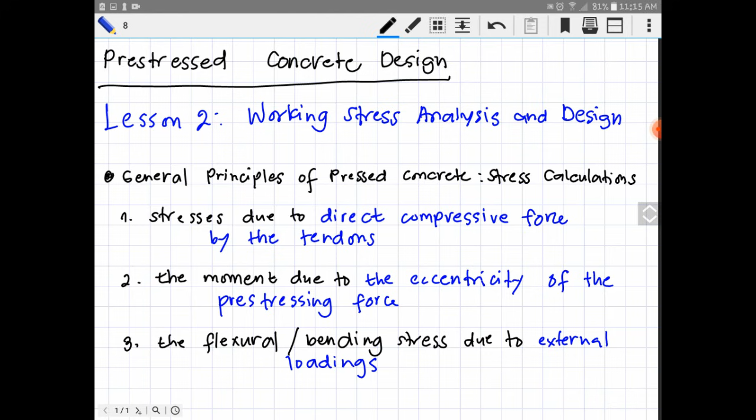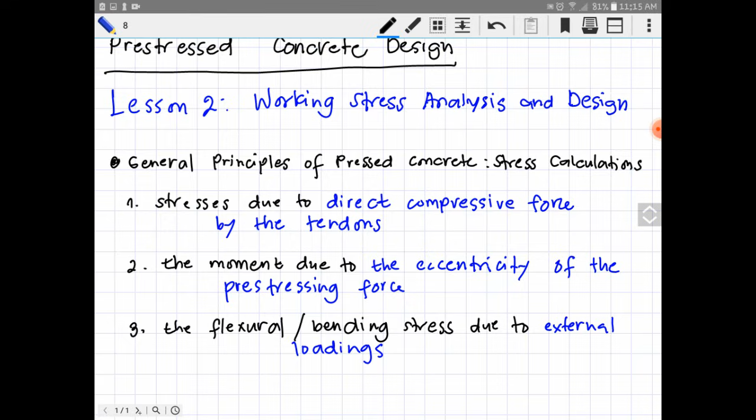We have three general principles of pre-stressed concrete. The stresses to be considered are: number 1, the direct compressive force by the tendons; number 2, the moment due to the eccentricity of the pre-stressing force; and number 3, the flexural or bending stress due to the external loadings.

So what is the principle of pre-stressing? Let's start with the basic concept. This is a simplified approach used to determine the internal stresses in a pre-stressed concrete member by considering the combined effect of the pre-stressing force and the external loading.

Consider a simply supported beam, assuming the tendon is below the neutral axis. So this is our tendon, and of course our beam also has a neutral axis here. Let's label it NA. So as stated, this is below.

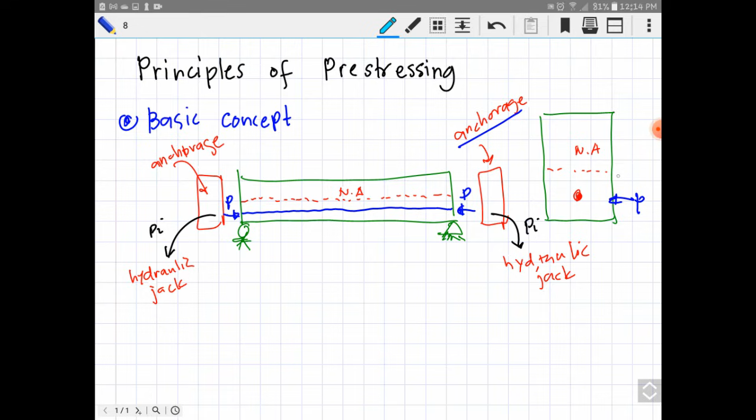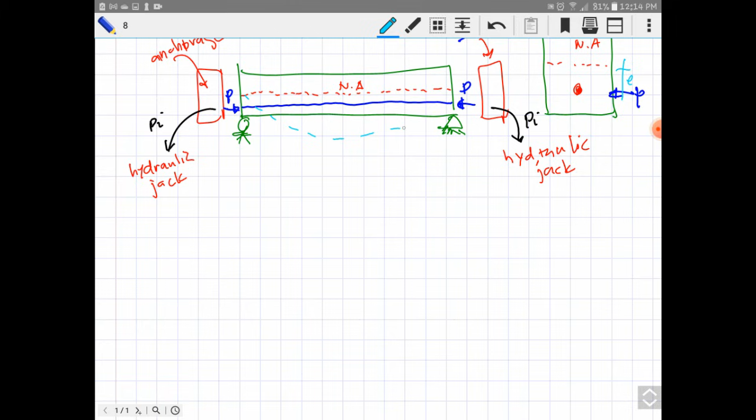Now, when we have stresses or flexural bending due to external loads, the beam may deflect. So let's assume the beam deflects. The neutral axis, of course, remains the same, but on the top fiber it compresses. So we can label this with letter C because it compresses, and our bottom fiber experiences tension.

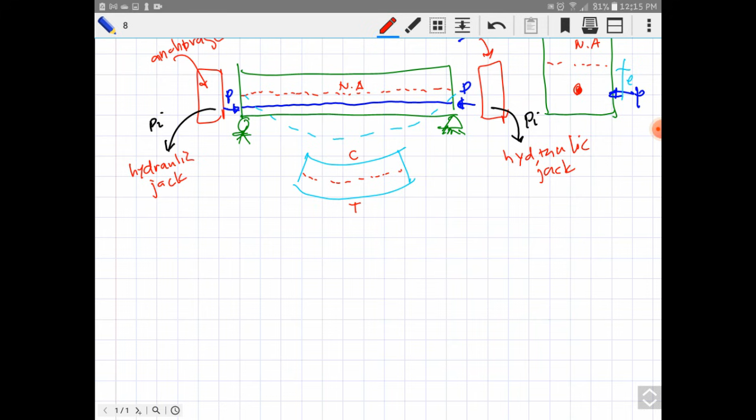Now, as stated in the three general principles of pre-stress, we need to have flexural stress due to the external loadings. So we can place here uniform distributed loads, such as the self-weight of the beam, or our dead loads or live loads. So we can have self-weight plus dead load plus live load.

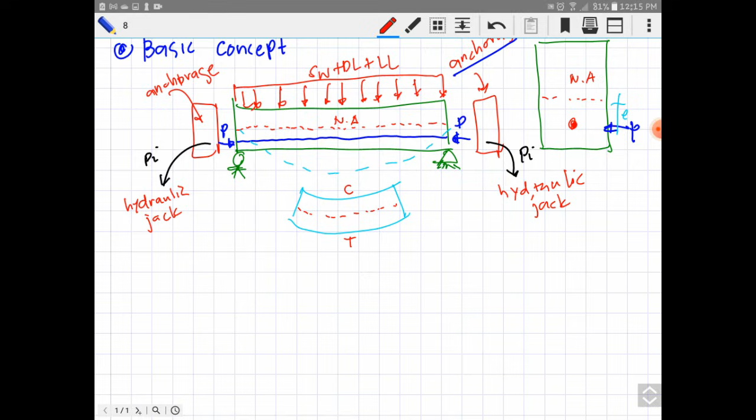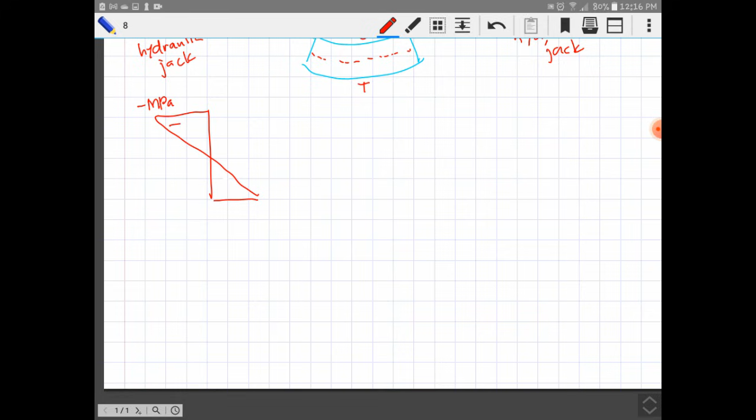So when we take the bending or flexural stress due to the external loadings, we can illustrate it like this: we have a negative MPa at our top fiber, and we have a positive MPa at our bottom fiber.

Now let's add our stresses due to the compressive force by the tendons. Since that is axial, this is negative MPa on the top and negative MPa on the bottom.

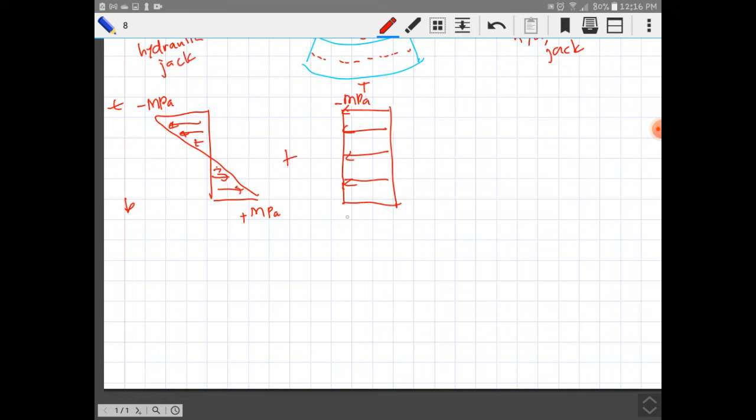Then let's add the moment due to the eccentricity of the prestress. So according to our rules, our flexural stress should always be opposite to our moment due to the eccentricity of the prestress.

So now, our illustration would be that the top fiber will experience a positive megapascal, while the bottom fiber will experience a negative megapascal. Let's get the resultant of that. By the way, this is just an illustration, so this is what we would get there.

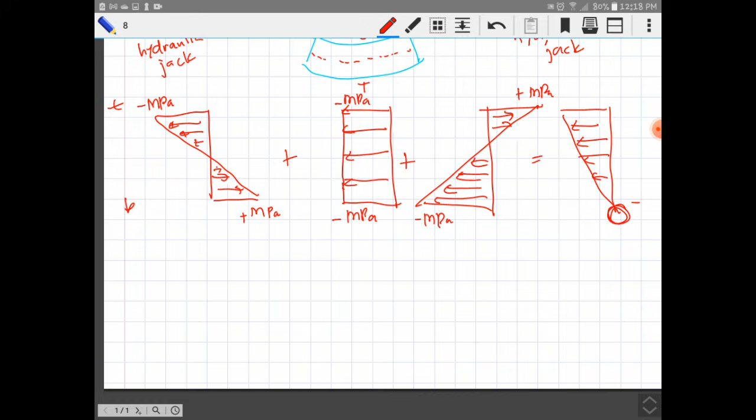So here is our general formula, which we will use in our problems. We have F equals our flexural stress due to the external loadings, positive or negative MC over I.

So what is M? Our M is the moment we get from the maximum moment due to the external loadings. Our loadings can be the self-weight of the beam, dead load, or live load.

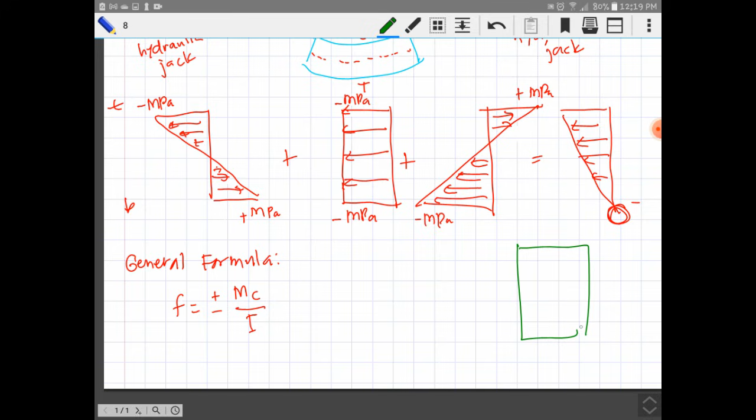What about C? Our C is the distance from the top or bottom fiber, or the farthest distance. So if this is our beam, this is our neutral axis, and our C is this. Some references label it as C sub T and others as C sub B, meaning C on the top fiber and C on the bottom fiber.

So what about I in the denominator? I is the moment of inertia of the beam.

Then after that, let's add our direct compressive force by the tendons, which would be negative P over A. So what is A? P is the prestressing force, and A is the cross-sectional area of the beam.

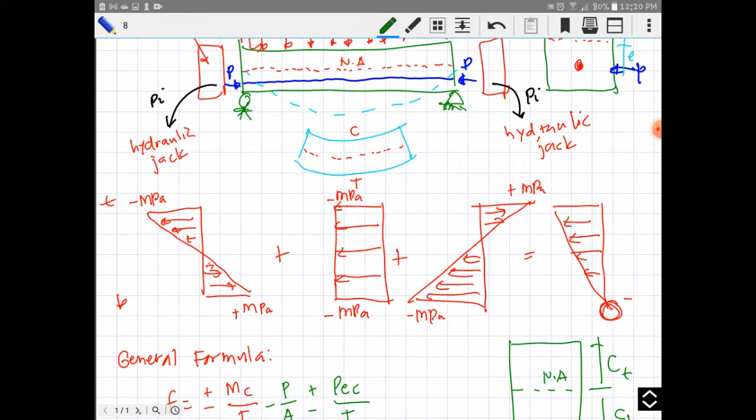Then let's add again the moment due to the eccentricity of the prestress, so plus or minus PEC over I. What is P? Again, P is the prestressing force. E is the eccentricity, or the distance from the prestressing force to the neutral axis, times the distance from the neutral axis to the farthest fiber, over our moment of inertia.

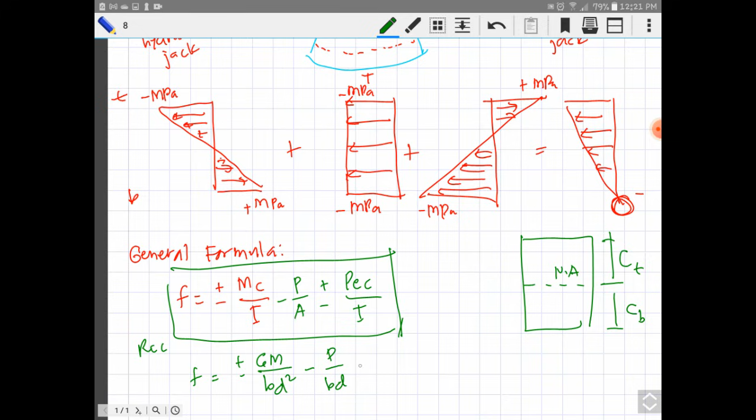So this is the formula we will use. Although, for the rectangular section, this equals positive or negative 6M over BD squared, minus P over BD, plus or minus 6PE over BD squared, where 6 is constant. So this is for our rectangular section.

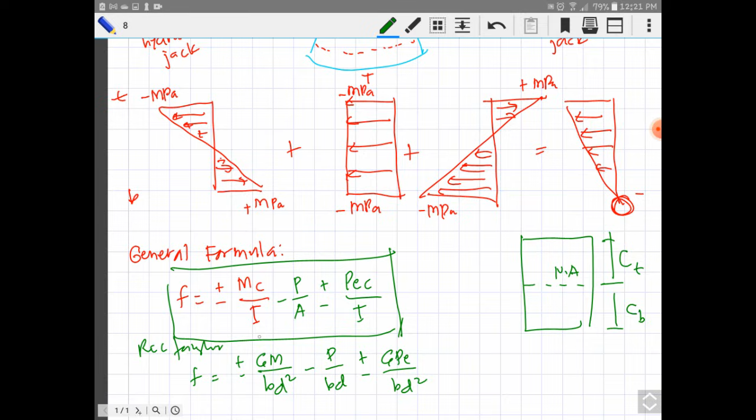Now let us come to the stages of prestressing. First, we have the initial state or at transfer. This is the moment when the prestressing force is initially applied to concrete, meaning it occurs right after the tendons are tensioned and the formwork is removed, or when the concrete has been cured, and at this point the concrete has not yet undergone significant load bearing or service condition.

So we can say that in this initial state at transfer, our prestressing force is still equal to its initial prestressing force, and our moment here is equal to 0.

Now for the initial state after transfer, the prestressing force has been transferred to the concrete. While before there was no significant load bearing, now there is. The concrete starts to carry the prestress loads. In this stage, the period immediately following the transfer of stress from the tendons to the concrete until the structure is in service, the structure has not yet been subjected to any external load like live load or dead loads, but the concrete is already reacting to the initial force and to our self-weight.

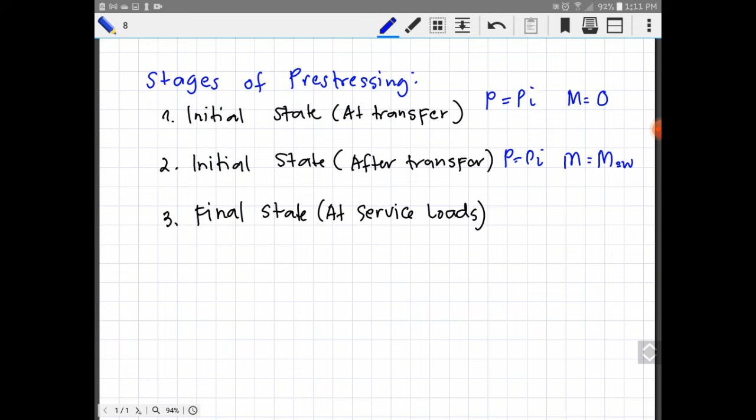It represents the state where the prestressed concrete member is fully loaded with service loads, taking into account all the prestresses, including the losses. In lesson 1, we had an initial introduction about prestress losses, which occur over time, especially affecting the final effective prestressing force acting on the concrete.

Over time, when we have losses in prestress, the force decreases due to factors like creep, shrinkage of concrete, or slippage of tendons. The final state considers this loss of prestress and its effect on the overall performance of the element. Prestress loss needs to be accounted for in design to ensure the element continues to perform effectively under service conditions, which is why we reduce the effective prestressing force.

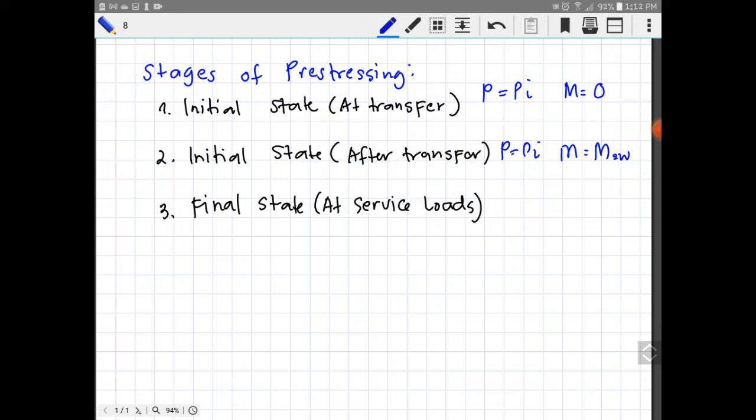So what is under-service load? External loads such as dead load, live load, or any other loads applied to this prestressed concrete element at the final state. These loads combine with the previously applied prestress force, influencing the overall stress and strain distribution within the concrete element, and this is where losses can occur.

Sometimes our P here is just equal to PI, or PE, multiplied or reduced by losses. So how do we subtract the loss? We simply subtract it from the original prestress force, multiplied by the quantity 1 minus the percent of our losses.

For example, suppose we have a prestressing force of 2,000 kilonewtons, and we have 5% losses. So what happens is 2,000 kilonewton multiplied by 1 minus 5%. Of course, the value of our prestressing force will decrease, and that will equal... since we already subtracted, that would be our P equal to 1,900 kilonewton.

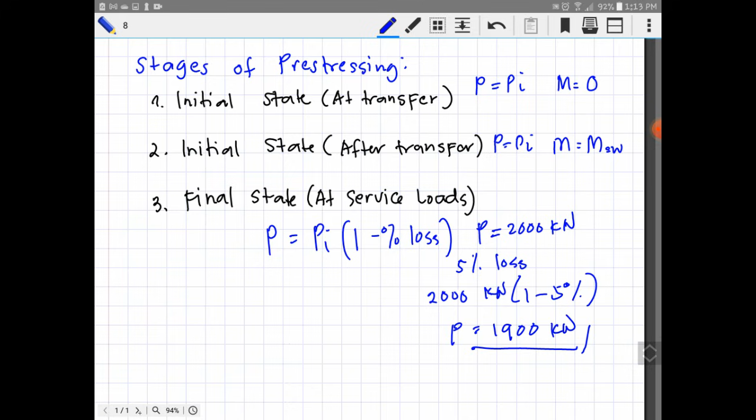Because we have a loss of prestress, our moment here will be equal to the total moment. Total means the moment from self-weight plus the moment of dead load plus the moment of live load, or whatever imposed loads are on our beam.

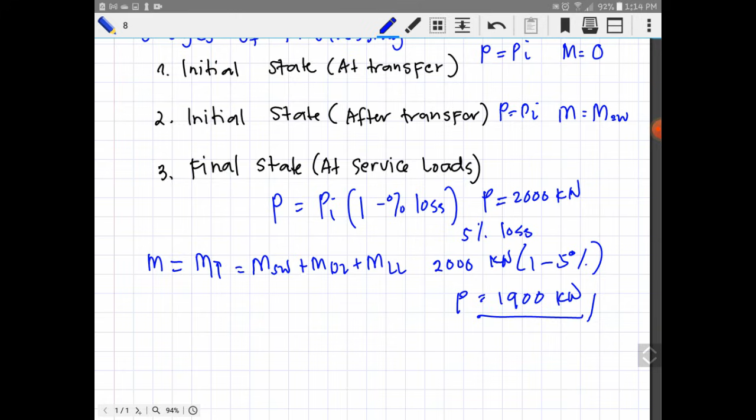Now let us come to solving these illustrative problems, working example using the basic concept method. For situation number 1: a prestressed concrete beam having a cross-section of 500 millimeters width by 800 millimeters height is subjected to a prestressing force of 1,950 kilonewtons. So our P would be 1,950 kilonewton acting on the parabolic tendons.

By the way, the different profiles of parabolic tendons are in our module 1, so you can review that. The beam carries a uniform dead load of 24.8 kilonewton. So let's add 24.8 kilonewton dead load, uniformly distributed, that is 24.8 kilonewton per meter, excluding its own weight.

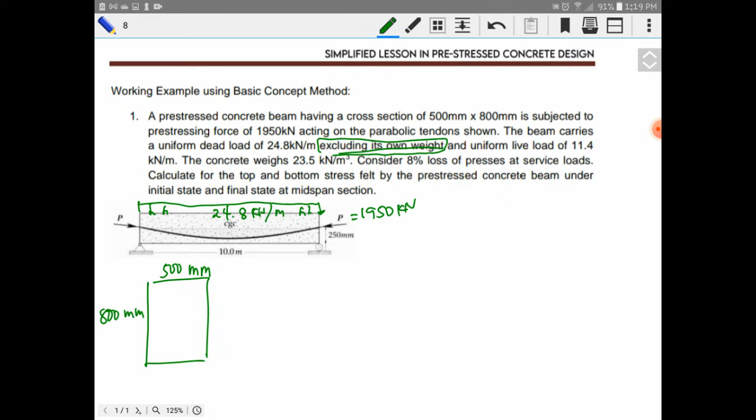And there's also a uniform live load of 11.4 kilonewton. So we have dead load of 24.8 kilonewton per meter and live load of 11.4 kilonewton per meter, both acting on our beam. There's more - consider 8% loss.

So we now move to the third state, which includes losses in our prestressing force and service loads. Calculate the top and bottom stress felt by the prestressed concrete beam under the initial state and final state at the mid-span section.

We know that because of these loadings, even our self-weight, our beam will bend, so let's add deflection there. We can say that the orientation or convention of our beam due to external loading would be compression at the top and tension at the bottom. So compression is negative and tension is positive - this is due to external loading.

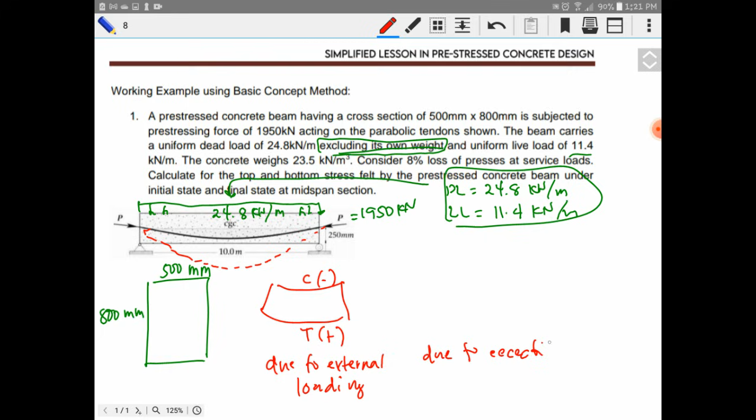So ano naman kapag due to eccentricity? Pag due to eccentricity naman ito, baliktad tayo dyan. Malamang kasi ika-counteract ng ating tendons yung ating bending due to the external loading. So ang mangyayari dyan, baliktad naman siya, wherein yung ating top fiber will be experiencing tension, positive, at saka yung ating bottom fiber will experience compression, negative.

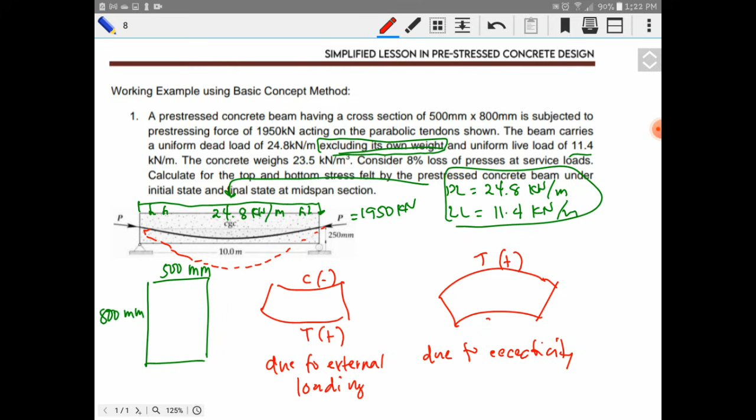Okay, so ano yung first step na gagawin natin dyan? Una, kunin muna natin yung moment at midspan. Alam naman natin na along the way, sa midspan tayo magkakaroon ng pinakamataas na moment. Ano ang i-consider natin dyan? I-consider natin, sabi kasi kanina, excluded yung beam weight. So yung beam weight, doon natin kukunin yung ating moment. Due to the beam weight.

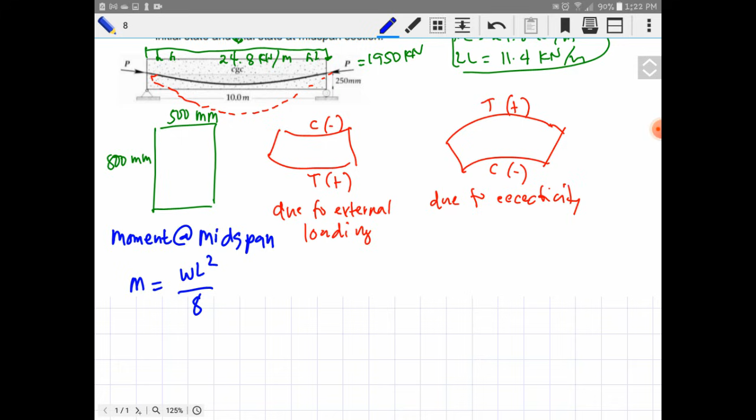Meron tayong formula. Maximum moment on the midspan is equals to WL squared over 8. Ano yung W dito? Ang W dito is the load imposed on the beam, in this case yung beam weight muna. So this would be equals, ano ba yung unit weight ng concrete? That would be 23.5 kilonewton per cubic meter. Multiplied natin to by the cross-section nung ating beam plus yung L natin.

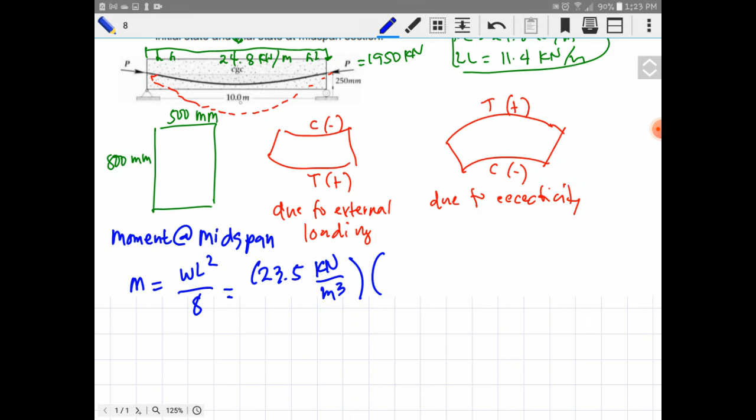O meron tayong span na 10 meter, baka makalimutan natin yan. So multiply natin to by 0.5 meter, yan yung ating width, at saka multiply natin ng 0.8 meter yung ating depth, multiplied by 10 meters. And of course i-squared natin yan based on the formula, all over natin siya by 8.

Now we can get here the moment or maximum moment due to the beam weight, and that is equals to 117.5 kilonewton meter. Siyempre cancelled natin to, no? At isa na lang ang matitira dyan. So kilonewton meter na tayo dyan, moment.

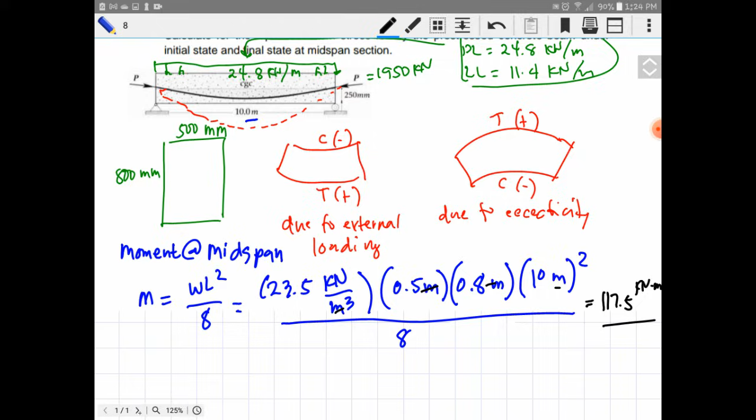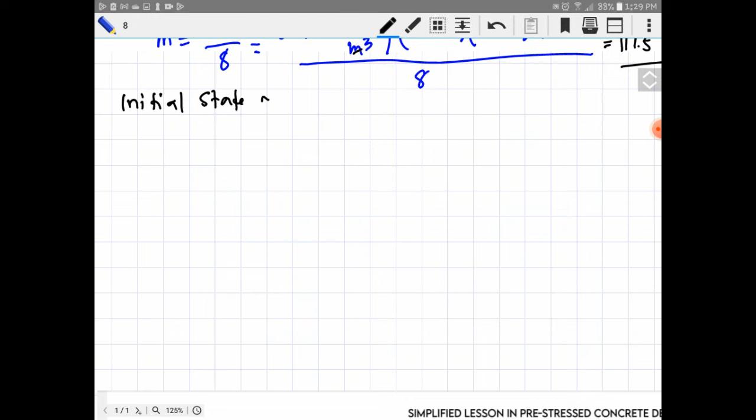Okay, so next would be solve the initial state. Dito naman tayo sa initial state at mid-span. So with the formula F is equals to, i-arrange natin siya based dun sa ating convention dahil yung ating due to extending external loading nga, negative siya on the top fiber at saka positive siya on the bottom fiber. So that will be negative sa taas, positive sa baba na MC over I.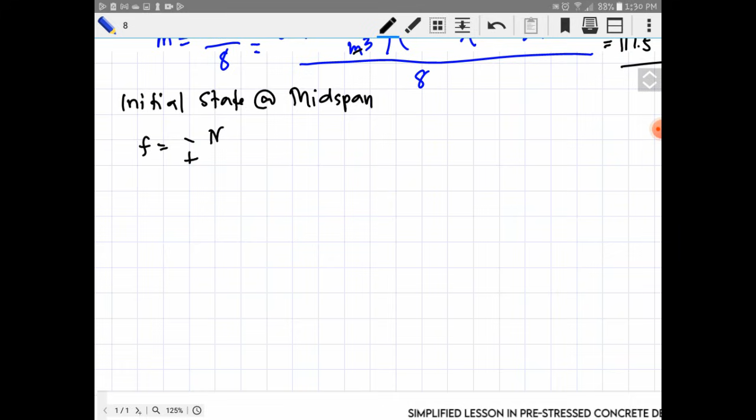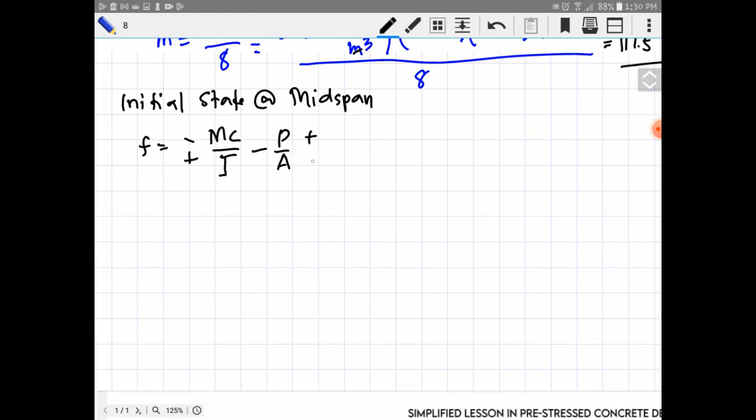Then yung ating axial load which is P over A, plus yung ating due to eccentricity which is positive on the top and negative on the bottom, PEC over I. Okay, dahil meron na tayong moment na nakuha natin due to the self-weight of the beam, yun yung gagamitin nating M dito.

So that would be MC over I is equals to 117.5, of course naka-kilonewton meter siya. So multiplied natin siya by 10 raised to 6. Bakit 10 raised to 6? Kasi yung 10 raised to 3, 1,000 yan. 1,000 para sa kilonewton, tsaka 1,000 para sa meter.

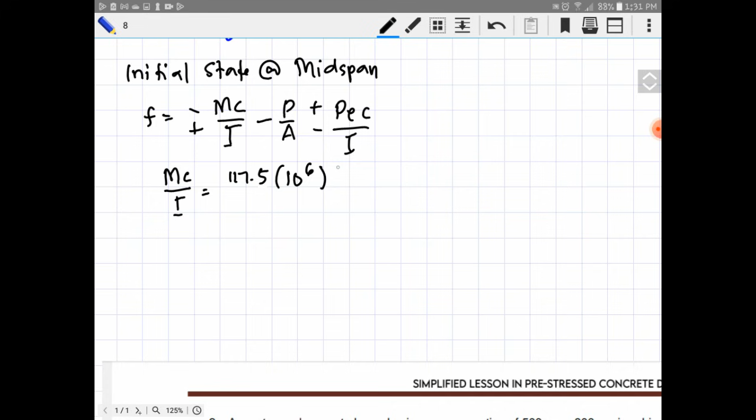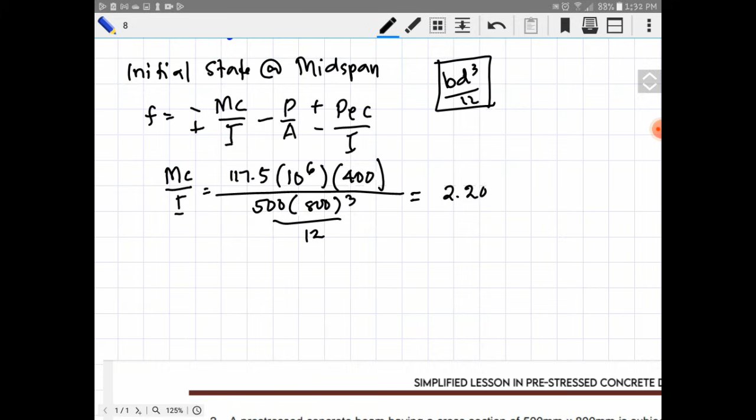Para maging newton meter, multiplied by yung C natin which is, ano ba yung C natin? Kalahati ng ating beam, ng ating height ng beam. So that would be 400 millimeter, all over natin ang ating moment of inertia ng rectangle, that is BD cube over 12 or BH cube. So that would be 500 multiplied by 800 cube all over. So kunin natin yan at ang sagot natin dyan is 2.203 megapascal. Again, yung ating top fiber is negative at yung ating bottom fiber is positive.

Okay, next, kunin naman natin yung ating axial. That would be equals to P over A, negative P over A. Ang P natin ay, ano yung P kanina? 1,950 kilonewtons. So multiply natin siya by 10 raised to 3, all over yung area ng cross-section area ng ating beam, which is 500 millimeter multiplied by 800 millimeter. And we can get our P over A, that is equals to negative 4.875 megapascal.

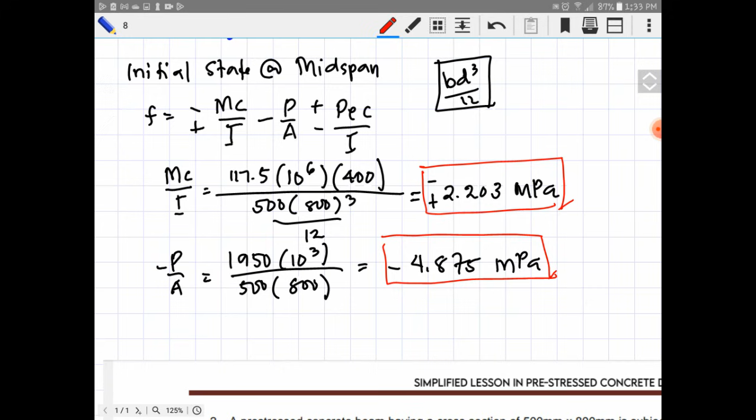Next, doon naman tayo sa ating PEC or yung ating due to eccentricity. Meron bang binanggit kanina kung ano yung eccentricity natin? Tingnan natin dito. Okay, so ito pala, meron tayong eccentricity na 250. So yun yung ating gagamitin dito.

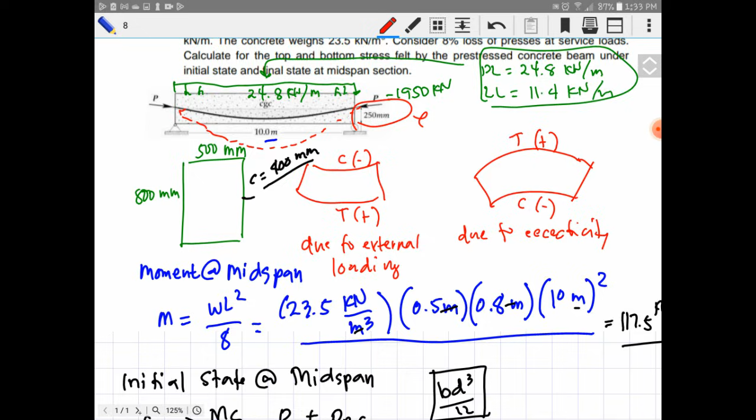So PEC over I. Ang P natin is 1,950 times 10 raised to 3, multiplied by 250 natin na eccentricity, multiplied by 400 mm na C or yung distance ng neutral axis to the farthest fiber, divided by yung moment of inertia, which is 500 multiplied by 800 cube all over 12. Makukuha natin yung sagot na 9.14.

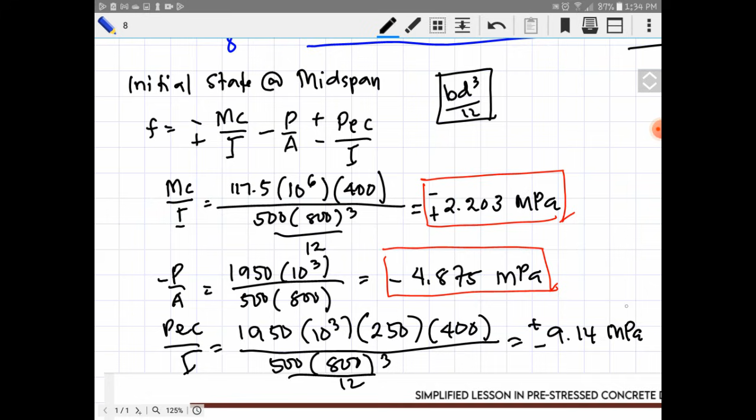9.14 megapascal, wherein yung top fiber would be positive at saka negative naman yung bottom fiber. So sa top fiber, i-add natin siya: negative 2.203 megapascal, minus 4.875 megapascal, plus 9.14 megapascal. Yun yung sa top fiber natin, so that would be equals to 2.062 megapascal. Positive siya, so meaning that is tension.

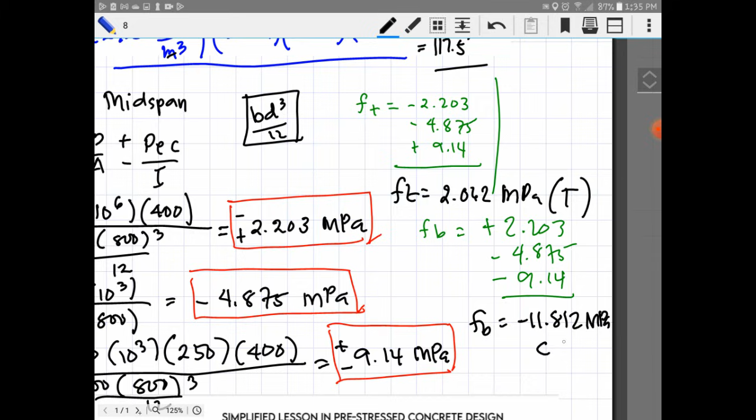Dito naman tayo sa bottom: positive 2.203, negative 4.875, then negative 9.14. I-add natin yan to get the answer. Yung bottom fiber will experience negative 11.812 megapascal. Negative siya, so meaning compression siya, negative. So ito yung ating sagot.

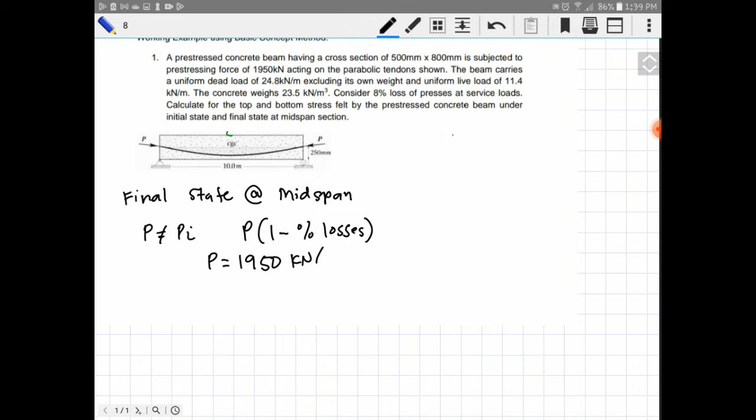Next will be on the final state at midspan naman tayo. Sabi natin yung P is not equal sa PI kapag nagkaroon na ng losses at saka kapag na-impose na yung mga loadings. So P is equal sa P natin i-multiply natin by 1 minus yung percentage ng loss o losses. Dito pa lang makukuha natin na yung P value is equals to 1950 kilonewton multiplied by 1 minus 8% of the losses. Makukuha natin na ating bagong pre-stressing force ngayon sa final state would be 1,794 kilonewton. Take note of this, baka makalimutan nyo yung ating consider 8% loss of pre-stress at service load.

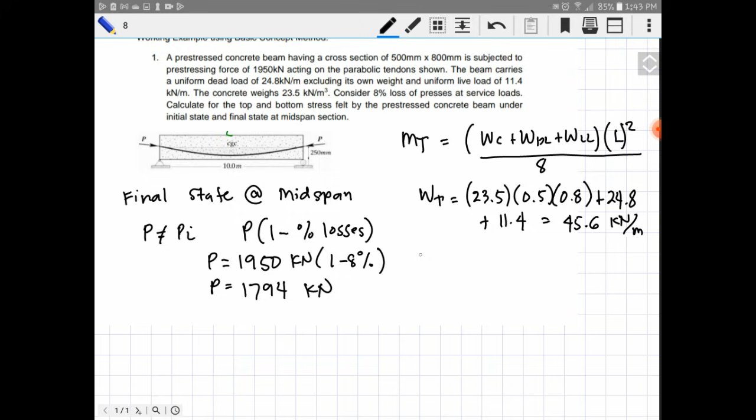Now for the moment, ang moment natin is moment total. Yun yung from the consider natin yung weight ng concrete plus yung weight ng dead load plus yung weight ng live load. Tapos i-multiply natin siya by yung span natin squared, all over natin siya by 8. Ngayon yung total moment natin would be equal sa, i-add muna natin yung mga weight. Weight, total weight is equal siya sa concrete muna, 23.5 multiplied by 0.5 multiplied by 0.8, plus na lang natin 24.8 plus 11.4 para naman sa ating live load. So this would be equals to 45.6 kilonewton per meter. Yon yung gagamitin natin sa ating maximum total moment.

So that would be WL squared over 8: 45.6 multiplied by 10 squared, yung ating span, all over yung 8 natin. So this will be 570 kilonewton meter. So that would be our moment.

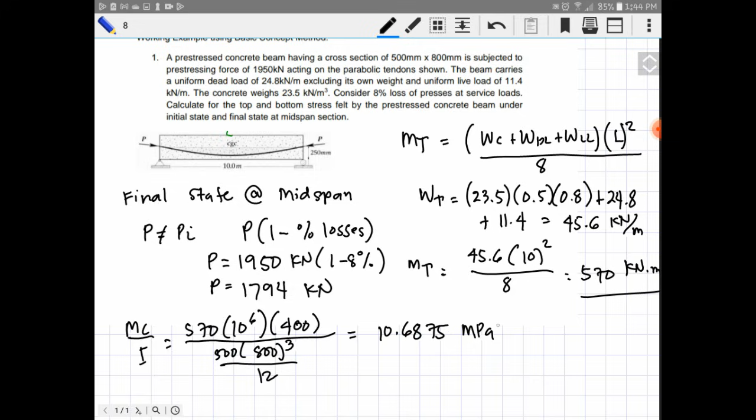Now let us come to the MC over I. Using this moment na 570 times 10 raised to 6, multiplied yung ating C which is 400, all over yung moment of inertia which is 500 multiplied by 800 cube all over 12. So we can get now the answer of 10.6875 megapascal. Again, negative on the top and positive on the bottom.

Next would be our PA. Ang P natin nagbago, 1794 na lang, multiplied by 10 raised to 3, all over yung area which is 500 multiplied by 800. So this would be negative 4.485 megapascal.

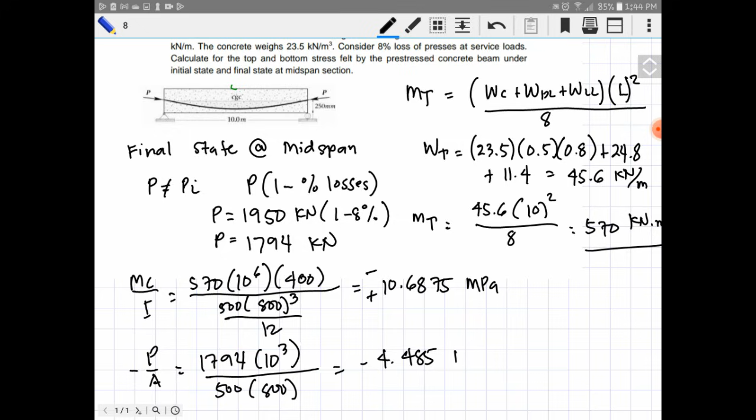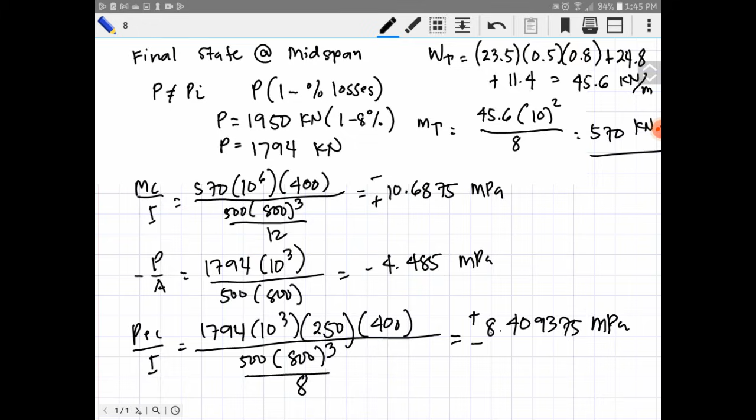Next would be for the PEC over I. Yung P natin or pre-stressing force would be 1,794,000 or 10 times 3 multiplied by E which is 250, multiplied by C which is 400, all over yung moment of inertia which is 500 times 800 cube all over 8. Now we can get now the value of 8.409375 megapascal, kung saan yung top fiber na positive at saka yung bottom fiber is negative.

Now combine natin siya to get the resultant. FT would be negative 10.6875 minus 4.485 plus 8.41. So this would be equals to negative 6.763 megapascal. Negative, so meaning compression siya. Next, for the bottom fiber naman,

positive 10.6875 minus 4.485 minus 8.41. So we can get now the value of negative 2.207 megapascal, at ito ay naka-under din siya sa compression. As you can see, parehong compression yung nakuha natin sa final state: meron compression na negative 2.207. So that concludes our first problem.